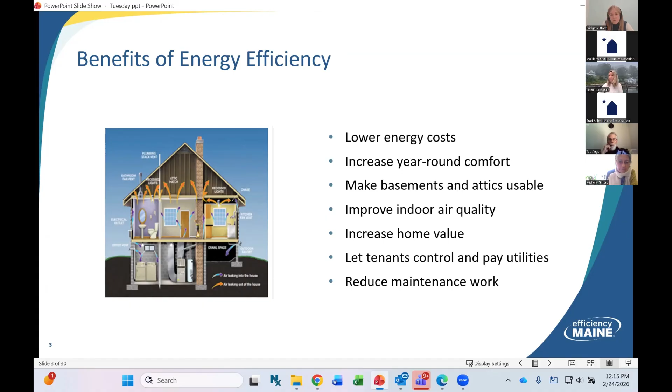So today we're going to talk about what we can do to be more energy efficient, who can do it, and how we pay for it. I'm going to start with our water heating.

I mentioned this is a do-it-yourselfer. If you're handy, this is what the heat pump water heater looks like, a lot like an electric resistance tank. This top portion is the heat pump technology. There's no other piece of equipment here—it's all contained in one tank.

We tend to say unfinished basement spaces are a great application for this. They kick out a little bit of cooler air and also help dehumidify the space they're installed in, so an unfinished basement is ideal. They're a little taller than your traditional electric water heater, so you want at least a 6-foot clearance in your basement.

They make lots of hot water, and every year over inefficient water heating, they can save more than $500 just in operational costs.

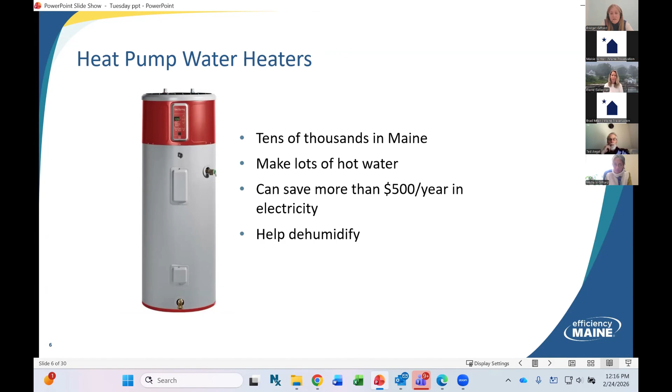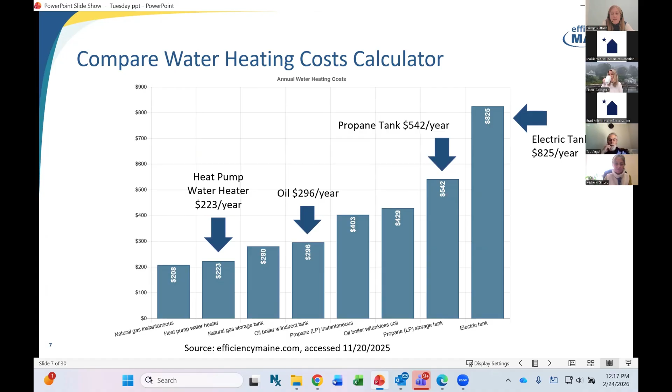This is how you can get that water heater. They're for sale at Lowe's, Home Depot, and other plumbing retailers. There's a QR code you can scan right in the aisle. At the register, you'll fill in your information through email, and you'll receive that barcode right at the point of purchase.

The discount will be taken off your water heater, so that when you leave the store, you don't have to do anything else—you've already captured that rebate.

This is a financial example, looking at a typical traditional water heater versus the heat pump water heater and all the savings you can expect. The warranty is longer on the heat pump water heater, it's larger with 10 extra gallons, and it does tend to cost a bit more—that's where our rebate comes in.

There's also a tax credit for 2025, and if that applies to you, you can capture that extra $150 before you file your taxes this year. But for new purchases in 2026, that won't apply.

So our final purchase cost is already much less than the traditional electric water heater, and then you've got that annual electricity savings. It's sort of a no-brainer—this is our gateway measure.

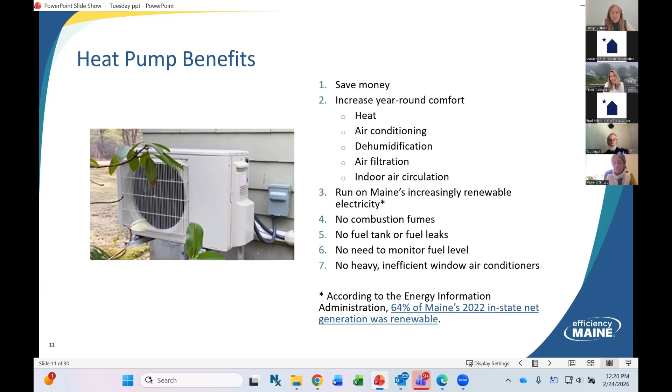We heat our homes a lot of different ways in Maine, and sometimes we heat them more than one way. On our website is a calculator, and you can put in your own consumption data. Say you use 1 cord of wood and 800 gallons of oil, and you can see what your expenses were annually and what they could be with a heat pump.

These values are updated on our website pretty regularly. You can see that these were taken on Christmas Eve, and we capture these rates that are published on the Governor's Energy Office website.

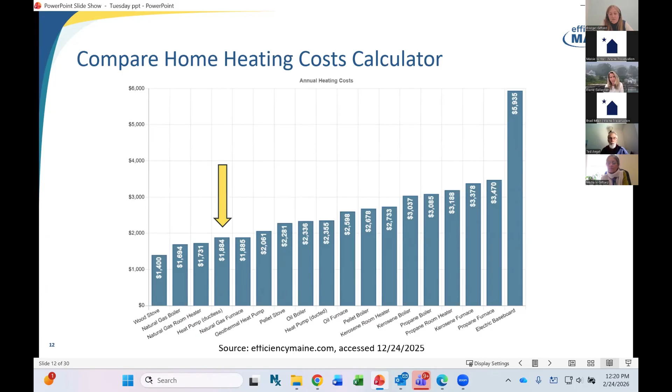So in order to really capture that rebate for the heat pump installation, that is not a do-it-yourself project. You want to have a professional installer look at that. They're going to do a sizing calculation for your home to make sure that you have enough heat pumps to keep you warm and toasty all winter, and sort out the airflow and configuration.

Our homes run the gamut in Maine, so an open concept home and a choppy home are going to need a different sort of heat pump system installation. The installers are trained in how to look for that, and you can use this database and sort by your zip code.

As I mentioned earlier, it will populate everyone in your area that does this work, and at the top it will have those installers that do the most rebates for Efficiency Maine. They're all vetted and they all have their insurance. But you can see who are those larger entities that do a lot of work for Efficiency Maine, and then on down the list.

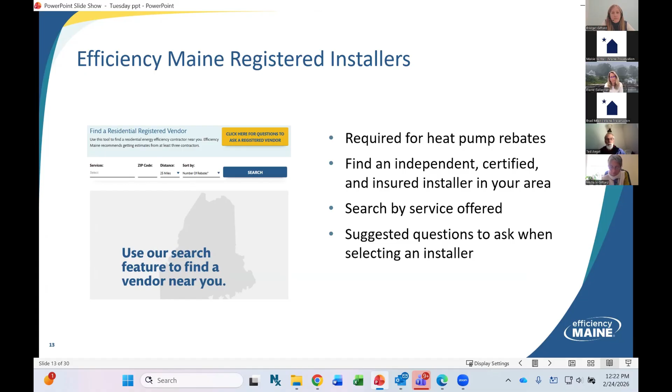These are the heat pumps themselves. The heat pumps are for homeowners who want to use heat pumps for their primary heating. So we're asking folks to turn their boiler thermostats down and reserve that as emergency backup, and really lean on the heat pumps for all of your heat throughout the winter.

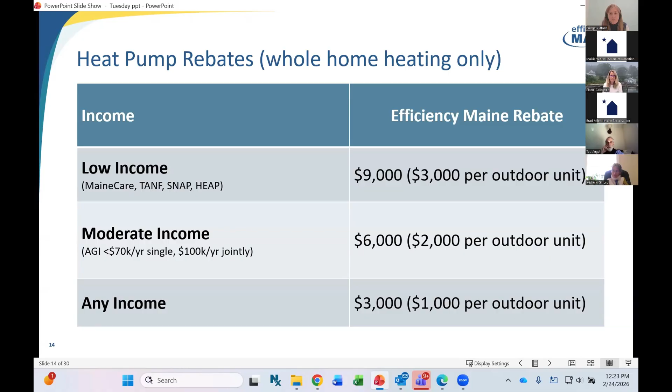It's going to matter what income the homeowner is and what the rebate will be from Efficiency Maine. So everyone is entitled to the $1,000 per unit rebate, and then we've got a moderate income category. If your adjusted gross income is within this threshold, we double that rebate. And if anyone in your household is on a benefit assistance list, MaineCare or SNAP, TANF, or HEAP, then we've got our largest, most generous rebate of $3,000 per unit.

If you are wanting to capture one of those enhanced rebates for low or moderate income Mainers, we've got this page on our website that we need to verify. We do that as quickly as possible, I think we say allow 5 business days, and once you plug your information in, we'll get right back to you and send you an email and a paper copy through the mail, so you've got that verification and can share it with your installer that you qualify for that higher rebate.

This is just a breakdown of how the whole flow goes. You want to verify income if that's applicable, and you want to go ahead and hire that installer. We also say get 3 quotes, so before you hire, you want to engage with more than one installer just to understand what the cost might be. They're all independent contractors, so they're going to set their own pricing.

That rebate check will go to either your contractor or you, depending on who is checked on the claim form. So essentially, you can just pay the delta and have the rebate go to the installer, or you can pay in full and then get that rebate check back to you. And then save all of your receipts if applicable for any tax credits the following year.

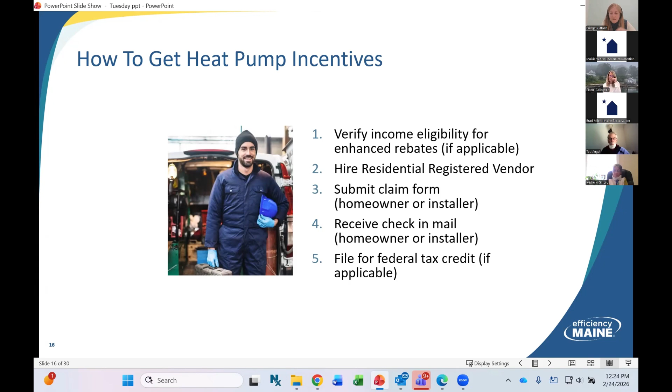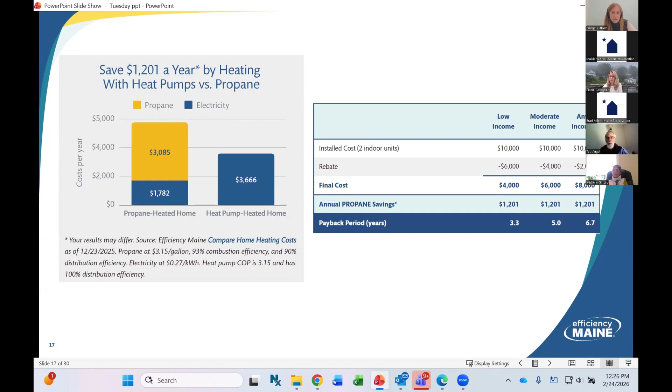Now, there will be a portion of the project not covered by the rebate, and that is your out-of-pocket cost. We do have a home energy loan product available for anyone who could find that useful to cover the delta.

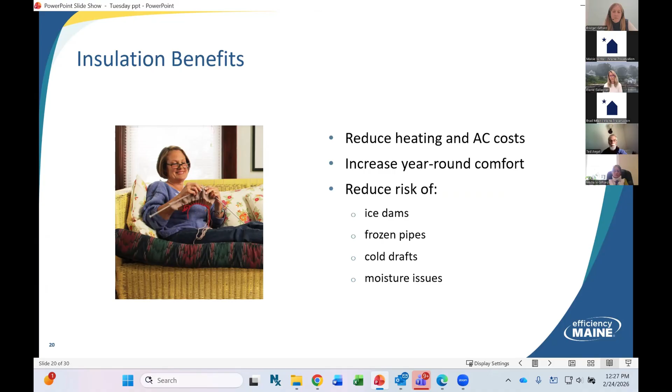I'm going to talk a little bit about insulation. This is a really popular offer. Some of the benefits are obvious, right - reducing costs, increasing comfort. This time of year, a lot of Mainers are struggling with ice dams, frozen pipes, and certainly cold drafts. So insulation can help really tackle those issues.

Again, this is not a do-it-yourself kind of measure. You want to have a professional installer do this work. They're going to make sure your home isn't too tight, where you'd be exacerbating some health and safety issues, and they'll ensure you get the expected energy savings that you invest in.

The rebates we offer for insulation are tiered by income, and in this case it's a percent of the project cost. So if your project is $10,000 - including a little attic, a little basement, maybe some wall insulation - Efficiency Maine will cover 40% of that, $4,000. If you're moderate income, Efficiency Maine will cover $6,000. And if you've got a low income person living in your home as their primary residence, Efficiency Maine will cover $8,000 of that $10,000 project.

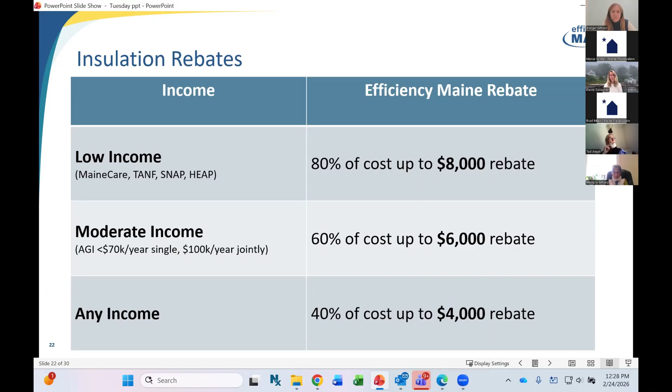It's a very similar flow. You want to verify income if applicable, then go ahead and hire whomever you like best after you've invited a few to give you quotes. The claim form is submitted and signed by both parties, and on that claim form there's a checkbox for where the rebate will go. We say allow 6 weeks for our rebates, but we try to deliver a lot faster than that - this is not something you're going to have to wait until April for. The rebate check comes to you as immediately as possible right after the work is complete.

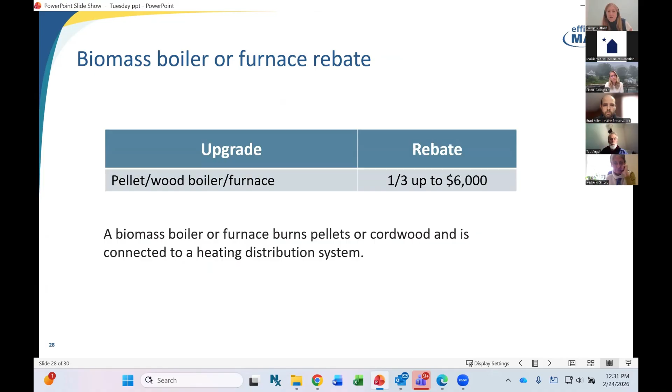This is a boiler in your basement where you're feeding it through a hopper connected to a distribution system, so this is a pretty generous rebate. Not a whole lot of Mainers heat this way, but it's available if you're interested, as well as a geothermal heat pump. It's a little different than the ducted system I talked about earlier. This digs down, and the installation tends to be a little higher cost, so we've got a $3,000 rebate on that.

Also a clothes washer rebate, this is just Energy Star. If you're in the market for a clothes washer, just be sure you buy an Energy Star one, save the receipt, and on our website you can fill that out, send it in, and you get $50 in the mail.

So everything I talked about is on our website at efficiencymaine.com, and we also have a call center in Brunswick. They're staffed Monday through Friday during working hours, and they can answer any question whatsoever or get you connected to the correct team.

So as Brad mentioned, I'm Elaine Gallagher. My day job is leading a team of engineers working on large, complex campuses, hospitals, big universities, things like that, really helping them map what is ultimately an economical path through an energy transition from all kinds of dirty energy and inefficient buildings to efficiency and clean energy. And it's really kind of great. So naturally, I have to walk my talk. There's no way I can't, right? I'm so passionate about this.

I actually started my career in historic preservation, largely in Denver, but also Massachusetts. And once you have that conservation head, you just can't stop. Back in the 90s, I was doing a lot of window retrofits for historic preservation, and my team got pulled into consulting on making buildings more energy efficient. We moved from not just historic buildings to any existing buildings, and then I got sucked into designing amazing new buildings that were greener than what was being built at the time. So my career has evolved from historic preservation through to very complex new buildings, and then also back to looking at hundreds of buildings at a time and trying to figure out how we can make them more efficient.

So I'm going to show you a story following largely what Bridget talked about, but I'll show you how I applied it. I bought a house in...

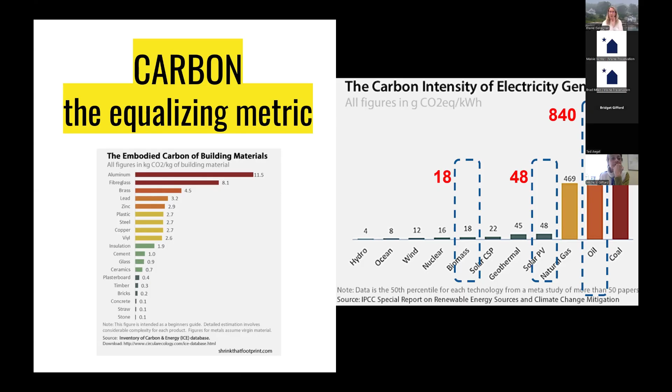We also have biomass here, which is wood - whether it's pellets commonly or firewood. Firewood is biomass. Really looking at carbon as the equalizing metric helps you look at the whole thing. Carbon also is a health factor - if you have something burning, combustion in your home, you have the potential for carbon monoxide poisoning. So when we eliminate carbon and combustion in our homes, we eliminate the chance that we will have carbon monoxide poisoning, which is a real concern.

So I've got this basement, and the thing you have to know about heat pumps is that there's not just one kind. Efficiency Maine, and a lot of people in Maine and New England in general, seem to talk about heat pumps as if they are only the ductless mini splits. Heat pumps come in a lot of different formats - you can have air-to-air, air-to-water, water-to-air heat pumps. There's all different kinds. You can have a heat pump that goes to a central air system, or a ductless mini split with its own abbreviated infrastructure inside your house. You can also get a high temperature heat pump water boiler.

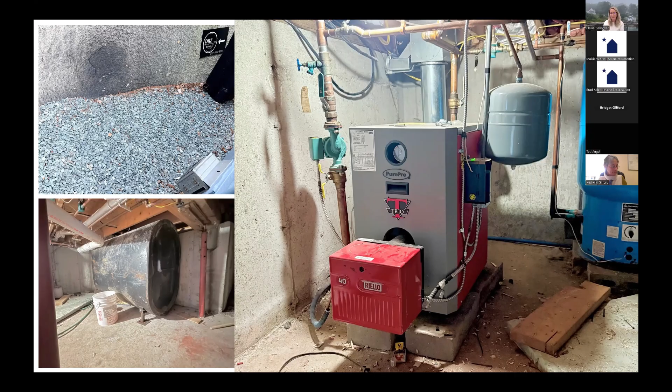Now, what I did do was put in - this is an example of one of the options they use in Europe for the high temperature air to water heat pump. What I did do right away, though, is install a heat pump water heater, just like what Bridget was showing you. Couldn't get that in fast enough, because that meant I could turn off that oil boiler for a big chunk of the year. Then all I had was the heat pump water heater in my basement, which, by the way, does cool the basement and dry it out - that's helped me a lot. Now I do have my oil boiler down there still, and I also have a battery down there generating heat.

So that area stays pretty warm, and my water heater can take that heat from that space and turn it into hot water. It's great. I do have firewood, right? So a lot of us do.

On average, heating a home in New England costs $602 for natural gas, maybe $1,000 for electricity, over $1,000 for propane, and $1,400 for heating oil for an average New England home. These are very high—if you've only lived here, this is higher than a lot of the rest of the country. The fact that we don't talk all the time at every cocktail party about how to reduce our energy costs just kind of floors me. But for me, solar energy is a no-brainer.

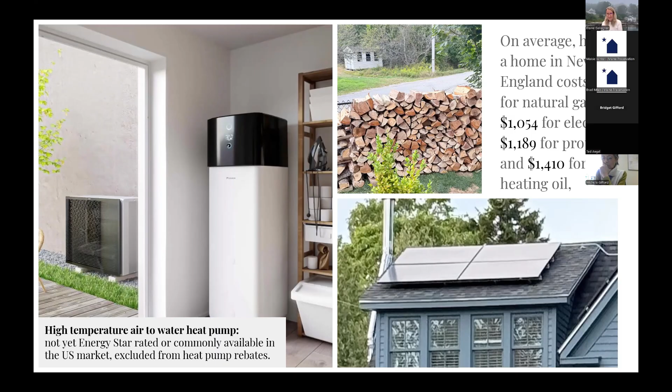I had one where the price was exactly right—it was like they took it right off of EnergySage, exactly where I expected it to be. And then they offered me solar financing. The solar financing wanted to charge me a finance charge of 30%. So the finance company was trying to take that 30% incentive. You have to be really on top of it. You have to know what you're doing.

The other things I did: I installed an induction stove. It was great, I love induction cooking—once you do that, you never go back. There's my heat pump water heater. Ended up with a beautiful kitchen. I should have shown you some befores, but I put in all LED lights all throughout the house.

Now, I don't buy LED light fixtures—I buy regular light fixtures and use LED bulbs. If you put in an LED fixture and it outlives itself and you have to replace just one, you can't, because you have to replace all of them since the new ones won't look like the old ones. It's much easier to replace an LED bulb than an entire fixture. That's just waste—try not to throw out more material than you need to.

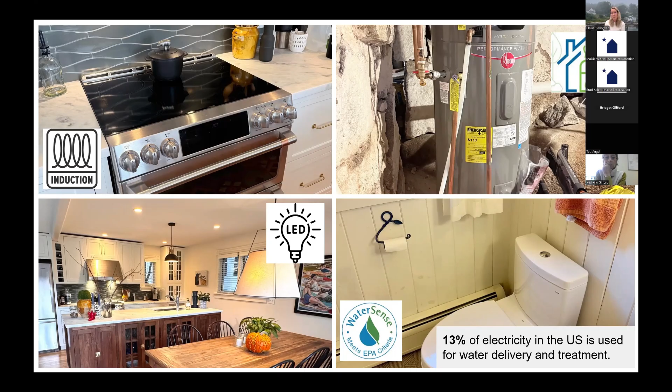I used all WaterSense fixtures in the house, just knowing that 13% of electricity in the United States is used just to deliver our water and treat our water.

Personally, I worked on tightening the envelope rather than insulating it. It was already insulated in 1991 as well as they did back then. But these windows, they're awful—I wish I had had the historic windows, I could have retrofitted the historic windows. I can't retrofit the Marvins. It's really frustrating, but we do what we can.

The rule of thumb with historic buildings is first, tighten them, second, insulate them. If you're going to insulate them, pay attention, because you could do a lot more damage than good. So focus first on tightening.

Ended up with just a really lovely home. Because I'm an architect, I'm allergic to color—I painted everything white and it just brightened up everything, of course. And again, all LED, all safe materials. I don't use anything toxic, all my paint is low VOC. It means something to me, it's really important, and trying to walk my talk—no compromises, and I mean on either side.

I live in a beautiful, almost net zero energy house. And at the same time, I speak up loudly when officials try to give historic buildings a free pass on energy, because I would argue vehemently that historic buildings are often better than newer buildings when it comes to energy efficiency and building performance. So that's it—walking my talk.